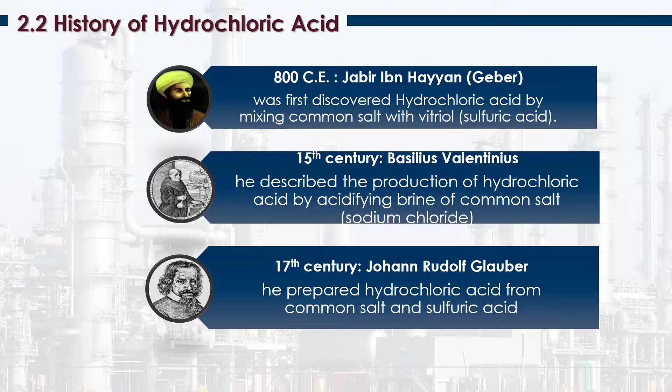In the 17th century, Johann Rudolf Glauber prepared hydrochloric acid from common salt and sulfuric acid. He was first to produce concentrated hydrochloric acid in 1625 by combining sulphuric acid and table salt. In the year 1772, Joseph Priestley of Leeds discovered hydrogen chloride, which he called marine acid air. This was made by heating copper with spirit of salt, but he eventually realized that the marine acid air was simply the fumes of the spirit of salt.

In the year 1818, Humphry Davy of Penzance proved that the chemical composition included hydrogen and chlorine. When Davy decomposed hydrochloric acid, then known as muriatic acid, he found that it consisted solely of hydrogen and chlorine.

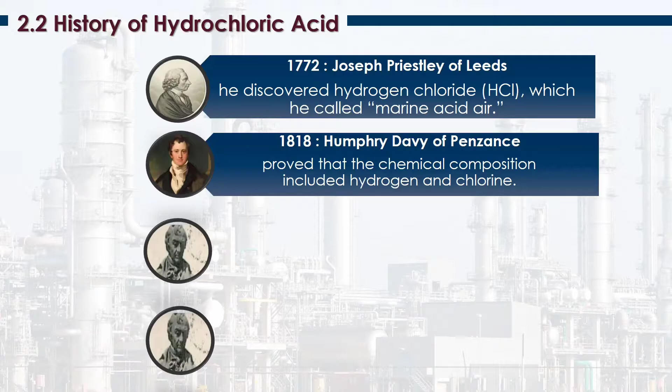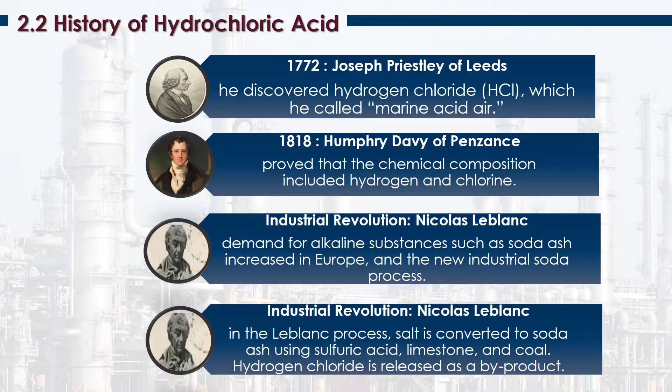During the Industrial Revolution, demand for alkaline substances such as soda ash increased in Europe, and Nicolas Leblanc developed the new industrial soda process for making soda ash, sodium carbonate, from common salt or sodium chloride. This process, which bears his name, became one of the most important industrial chemical processes of the 19th century. Moreover, in the Leblanc process, salt is converted to soda ash using sulphuric acid, limestone, and coal. Hydrogen chloride is released as a byproduct. And early in the 20th century, the Leblanc process was effectively replaced by the Solvay process without the hydrochloric acid byproduct.

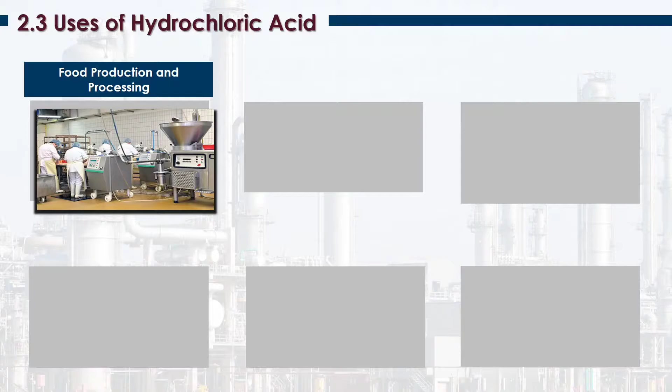Uses of hydrochloric acid for food production and processing. The food industry uses hydrochloric acid to process a variety of food products such as corn syrups used in soft drinks, cookies, crackers, ketchup, and cereals. Hydrochloric acid is also used as an acidifier in sauces, vegetable juices, and canned goods to help enhance flavor and reduce spoilage. For regeneration of ion exchangers, hydrochloric acid is more efficient than sulfuric acid to regenerate a strongly acidic cation exchanger.

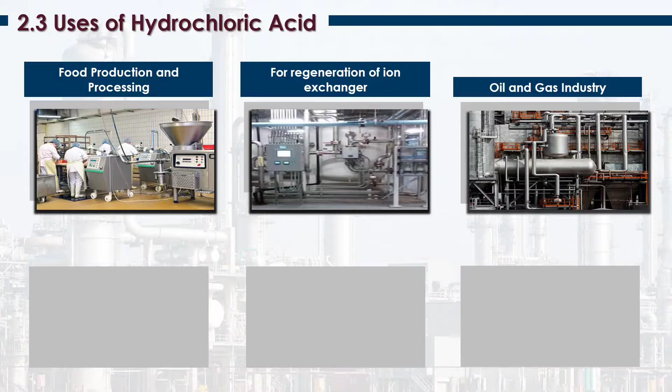For the oil and gas industry, hydrochloric acid is used in large quantities as a borehole drilling agent. This fracture stimulation fluid reduces the pH of drilling fluid systems and helps dissolve rock during drilling for the oil and gas industry. Also, hydrochloric acid is used in the activation of petroleum wells. For steel production, hydrochloric acid is a strong, corrosive acid that can be used industrially to process steel used in the building and construction industry.

For calcium chloride production, the process basically consists of limestone reaction with hydrochloric acid. It can also be produced as a byproduct from the Solvay process for soda ash. Calcium chloride solution can be produced by the neutralization of aqueous hydrochloric acid with calcium carbonate. For pH control, hydrochloric acid is supplied in liquid form of varying strengths. It is used for pH control when pool water is treated with sodium or calcium hypochlorite. Hydrochloric acid can be used to regulate the acidity of solutions.

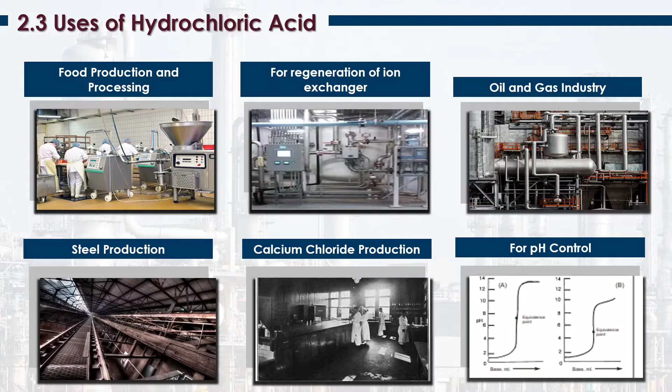Lastly, for leather processing. Hydrochloric acid is one of the substances used in the leather process. Hydrochloric acid was used to stop the development of bacteria and maintain the proper pH level of leather.

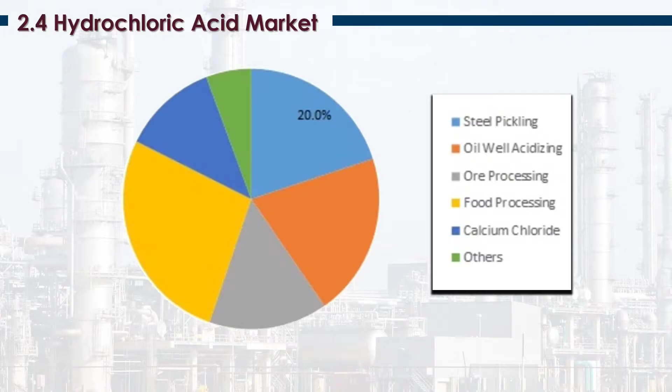Hydrochloric acid market. Most of the hydrochloric acid is produced from the chlorination of a wide variety of organic chemicals. It is an essential product of the chemical industry and used in many industrial processes such as oil well acidizing, food manufacturing, producing calcium chloride, ore processing and steel pickling.

As for regional analysis, first, Asia Pacific is estimated to have dominated the global hydrochloric acid market, with China, India, and ASEAN countries being the prominent markets in the region. The hydrochloric acid market in Asia Pacific is expected to be the fastest growing during the forecast period, owing to increasing manufacturing activities, growing population, and developing industries such as food, chemical, and textile in India and China.

Second, North America is expected to be the second largest market for hydrochloric acid. The North America market is expected to witness moderate growth during the forecast period. This growth can be attributed to increasing investment in hydraulic fracturing activities, growing construction industry, and increasing investment in the pharmaceuticals industry.

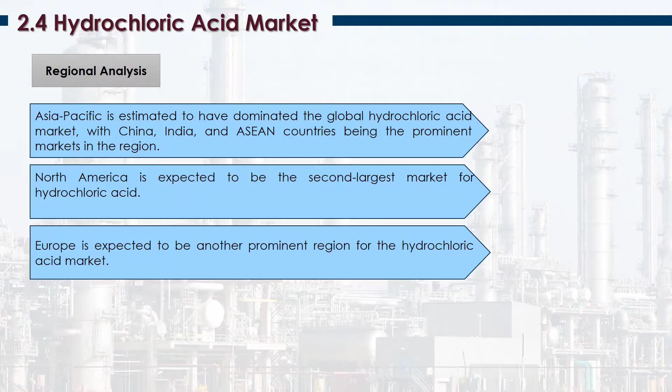Third, Europe is expected to be another prominent region for the hydrochloric acid market. The hydrochloric acid market in Europe is poised to witness steady growth backed by the growing chemical industry and increasing demand from the food and beverage industry. Germany, UK, Italy, and France are expected to be key markets for hydrochloric acid in Europe.

Fourth, the Middle East and Africa hydrochloric acid market is expected to witness moderate growth primarily owing to increasing investment in the oil and gas and steel industry in the region.

As for segmentation analysis, the global hydrochloric acid market has been segmented based on application, end-use industry, and region. Based on application, the global hydrochloric acid market has been categorized as steel pickling, oil well acidizing, ore processing, food processing, calcium chloride, and others.

By end-use industry, the global hydrochloric acid market has been divided into food and beverages, pharmaceuticals, textile, steel, oil and gas, chemical industry, and others. The global hydrochloric acid market by region has been segregated into North America, Latin America, Europe, Asia Pacific, and the Middle East and Africa.

Market overview of hydrochloric acid. The hydrochloric acid market was valued at around $950 million in 2020, and the market is projected to register a CAGR of over 5% during the forecast period. The COVID-19 pandemic had an adverse effect on the global economy, which includes disruption of the supply chain. Due to lockdown regulations and a deficient number of workers, the production in various chemical and other industries declined, and the supply of raw materials to the industries decreased.

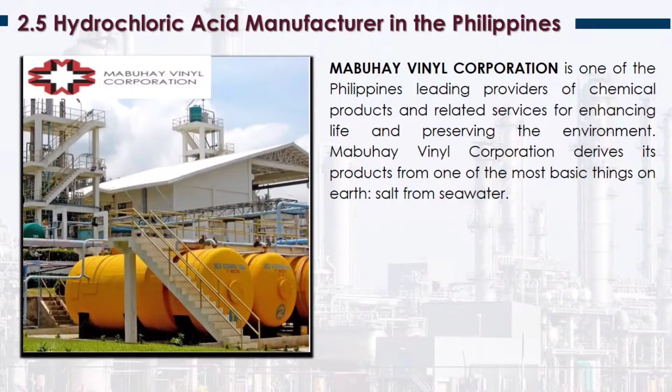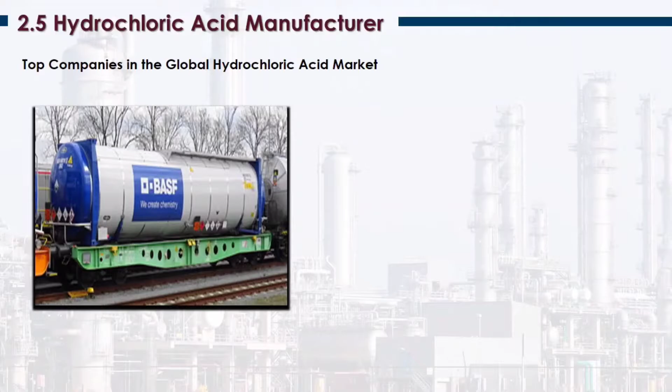So here are the top companies in the global hydrochloric acid market. Number 1, BASF. BASF was founded in the year 1865 and is currently headquartered in Germany. BASF is known to be the largest chemical producer in the world. The company's products and solutions primarily aim at conserving resources, ensuring good nutrition, and improving quality of life. Their product portfolio includes chemicals, plastics, performance chemicals, catalysts, coatings, crop technology, crude oil, and natural gas exploration and production.

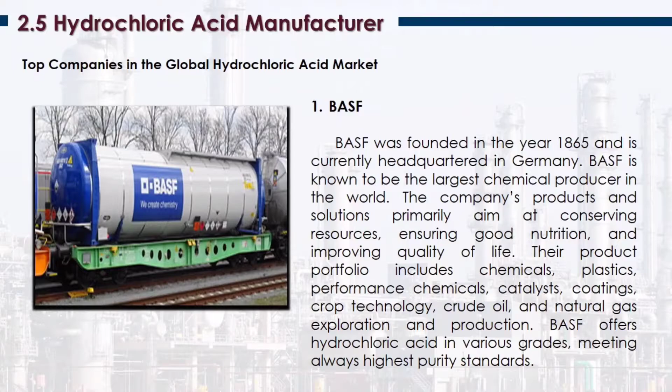BASF offers hydrochloric acid in various grades, always meeting the highest purity standards. The second one is Merck KGaA. Having a rich history of over 350 years, Merck KGaA is the world's oldest operating chemical and pharmaceutical company. Merck KGaA is a global company with approximately 53,000 employees spanning across 66 countries.

In the year 1967, the company initiated its involvement in liquid crystals, leading to its market-leading role today. Liquid crystals account for a major chunk of the company's profits at present. Currently, the company is the world leader in producing liquid crystals for flat TVs and monitors.

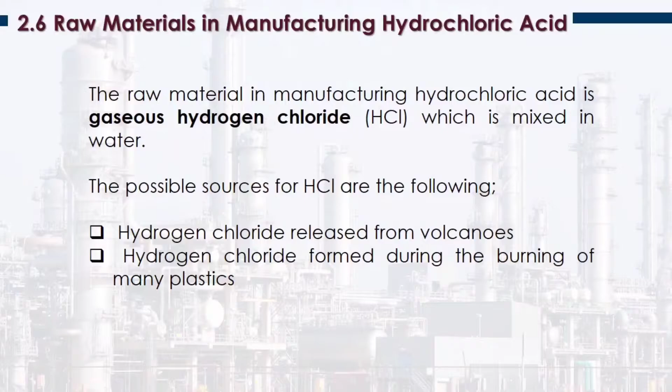So these are the raw materials in manufacturing hydrochloric acid. The raw material in manufacturing hydrochloric acid is gaseous hydrogen chloride, which is mixed in water. And the possible sources for this hydrochloric acid are the following. First, the hydrogen chloride released from volcanoes, and second, the hydrogen chloride formed during the burning of many plastics.

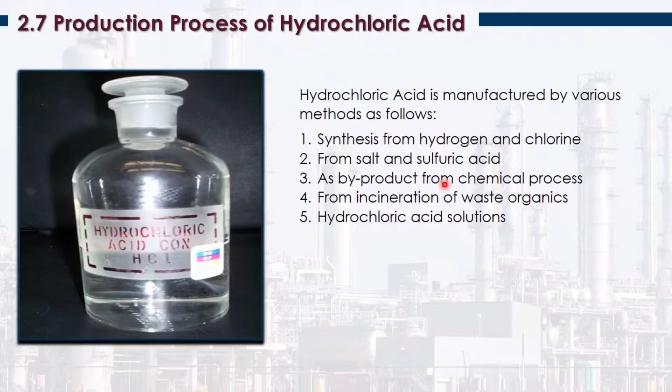Production process of hydrochloric acid. Hydrochloric acid is manufactured by various methods as follows. First, we have synthesis from hydrogen and chlorine. Second, from salt and sulfuric acid. Third, as byproduct from chemical process. Fourth, from incineration of waste organics. And the last one is hydrochloric acid solutions. From these methods, we will only be focusing on the first two methods: the synthesis from hydrogen and chlorine and from salt and sulfuric acid.

So the first step in manufacturing hydrochloric acid is by synthesis from hydrogen and chlorine. There is large demand in the market for water white acid. Such acid is obtained by the synthetic method, and most of the plants are based on this process. The raw materials are the following. For the basis of 1,000 kg of hydrochloric acid with a 98% yield, we have hydrogen 28.21 kilograms, and for chlorine

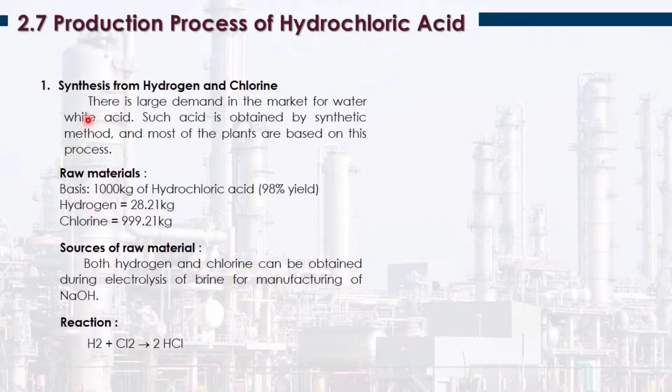999.21 kilograms. For the sources of raw material, both hydrogen and chlorine can be obtained during electrolysis of brine for manufacturing NaOH or sodium hydroxide. The reaction is 1 mole of hydrogen reacts with 1 mole of chlorine to yield 2 hydrogen chloride: H2 + Cl2 → 2HCl. Okay.

So here is the simple process flow diagram in manufacturing hydrochloric acid from synthesis of hydrogen and chlorine combustion. As you can observe in this diagram, the hydrogen is burning in the presence of chlorine gas here in the combustion chamber. As the combustion of hydrogen takes place with the presence of this chlorine gas, there will be hydrochloric acid vapors produced.

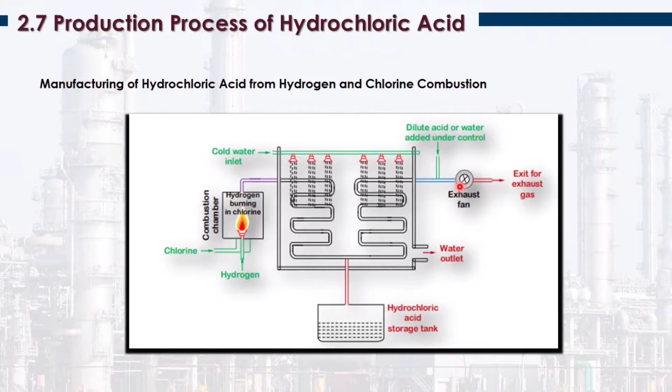And then the exhaust gas which is free from these hydrochloric vapors is released through the exhaust fan. So the gas that was not dissolved here with the hydrochloric vapors will be released through the use of this exhaust fan.

So the second method in manufacturing hydrochloric acid is the salt sulfuric acid process. In this method, the reaction between sodium chloride, NaCl, and sulfuric acid occurs in two endothermic stages. The raw materials for 1,000 kilograms of hydrochloric acid: sodium chloride will be 3,206 kilograms and sulfuric acid 2,688 kilograms.

Sources of raw materials: sodium chloride can be obtained from seawater, salt lakes, and subsoil water, and sulfuric acid can be obtained by contact process. The reactions are the following. Sodium chloride is reacted with H2SO4, sulfuric acid, to yield sodium bisulfate and hydrochloric acid. Second, NaCl is reacted with sodium bisulfate to produce sodium sulfate and hydrochloric acid.

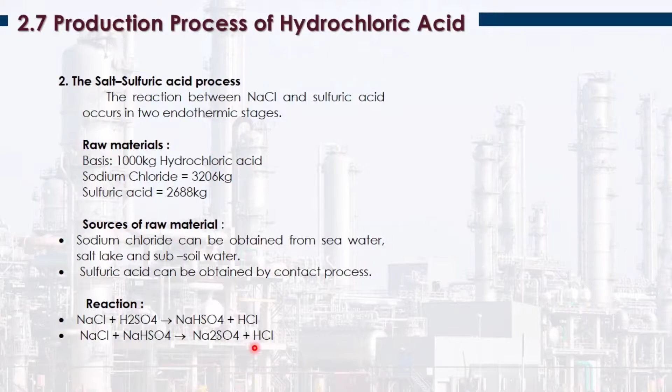Okay, so this diagram is the manufacturing of hydrochloric acid from salt and sulfuric acid. In the first step, their process of obtaining hydrochloric acid is different; here they used salt and sulfuric acid. As you can see in the diagram, our feeds are the salt, or sodium chloride, and the sulfuric acid, which are introduced to the reactor.

The reactor in this case is nothing but the furnace operated on fuel. In this reactor, the byproduct, sodium sulfate, is removed from the bottom of the furnace. And the product mixture containing hydrochloric acid vapors is passed to the cooler. So there is remaining hydrochloric acid vapor here, which passes through to the cooler.

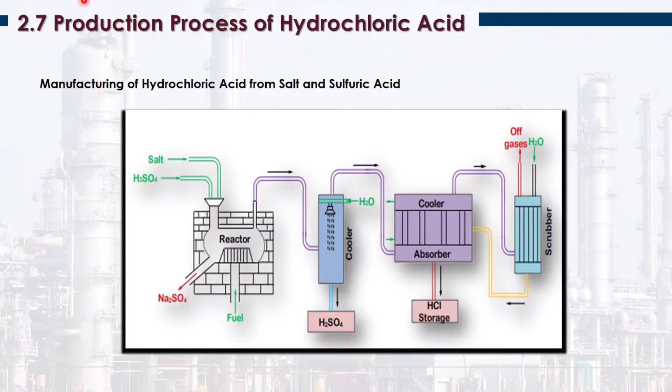The third method in producing hydrochloric acid is as byproduct from chemical processes. Over 90% of the hydrogen chloride is produced as a byproduct from various chemical processes. The crude HCl or the hydrochloric acid generated in these processes is generally contaminated with impurities such as unreacted chlorine, organics, chlorinated organics, and entrained catalyst particles. A wide variety of techniques are employed to treat these HCl streams to obtain either anhydrous HCl or hydrochloric acid.

Some of the processes in which HCl is produced as byproduct are the manufacture of chlorofluorohydrocarbons, manufacture of aliphatic and aromatic hydrocarbons, production of high surface area silica, and the manufacture of phosphoric acid and esters of phosphoric acid. So here, most of hydrochloric acid is produced from chlorination of organic chemicals with much smaller amounts derived from the other processes. So in this process, we also consider the chlorination of organic chemicals.

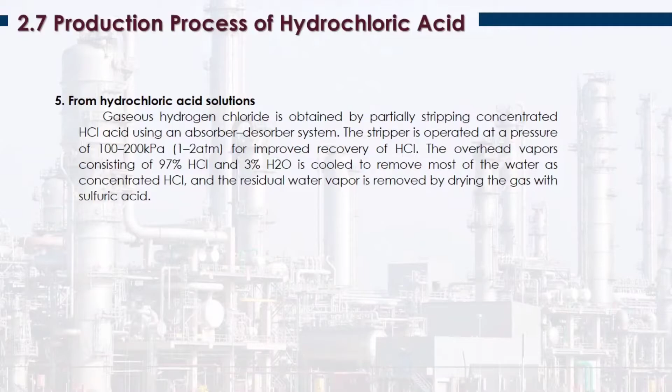So, the last method is from hydrochloric acid solutions. Gaseous hydrogen chloride is obtained by partially stripping concentrated HCl acid using an absorber-desorber system. The stripper is operated at a pressure of 100 to 200 kPa or 1 to 2 atm for improved recovery of HCl. The overhead vapors consisting of 97% HCl and 3% water are cooled to remove most of the water as concentrated HCl, and the residual water vapor is removed by drying the gas with sulfuric acid.

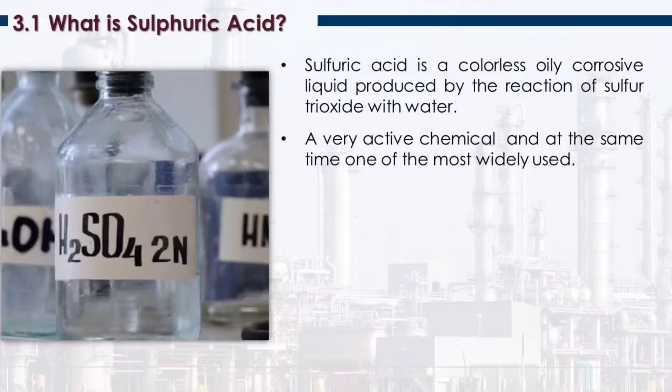Actually, it is known as the king of chemicals, and this is because of its direct and indirect applications in the manufacture of many chemicals. It is used in the preparation of hydrochloric acid, nitric acid, dyes, drugs, and many more. It also enters into many industries and is employed in the manufacture of fertilizers, leather and tinplate, in the refining of petroleum, and in dyeing of fabrics.

It is a dibasic acid with a molecular formula written as H2SO4. So sulfuric acid is a dibasic acid because it ionizes in aqueous solution to produce 2 hydrogen ions per molecule of the acid, or in other words, it contains 2 replaceable hydrogen ions per molecule of the acid. Its available forms include dilute sulfuric acid and concentrated sulfuric acid. Sulfuric acid is generally always found in concentrated form. It is available at concentrations as high as 98%. The dilute sulfuric acid is that in which the concentration of the water mixed in the acid is higher than that of the concentration of the acid itself.

So other names of sulfuric acid include king of compounds or king of chemicals, as mentioned a while ago, oil of vitriol, dipping acid, battery acid, electrolyte acid, Mattling acid, and dihydrogen sulfate.

Next, the properties of sulfuric acid. So again, it is a colorless, oily liquid with a density of 1.8 grams per cubic centimeter. So it has a high viscosity when it is not dissolved in water. Its density is almost twice the density of water because water has a density of about 1 gram per cubic centimeter. Hence, it is quite a dense liquid.

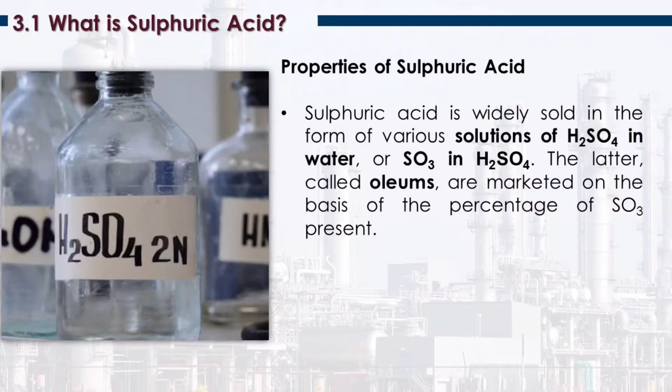So let me discuss more about its reaction with water. So what does sulfuric acid do with water? Concentrated sulfuric acid has a very strong affinity for water. The affinity of sulfuric acid for water is sufficiently strong that it will take hydrogen and oxygen atoms out of other compounds. It can also absorb water even from gases like the air, for instance, and even from hydrated

salts. So when some salts have water ingrained in their structure, sulfuric acid can actually remove that water, and this is because it is strongly attracted to it. So this makes it a very good drying agent, but take note that it is very dangerous.

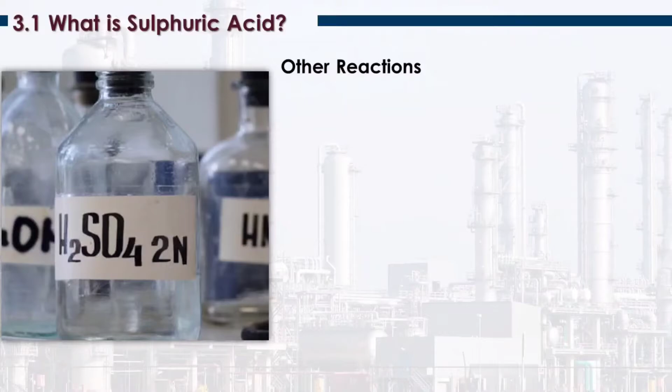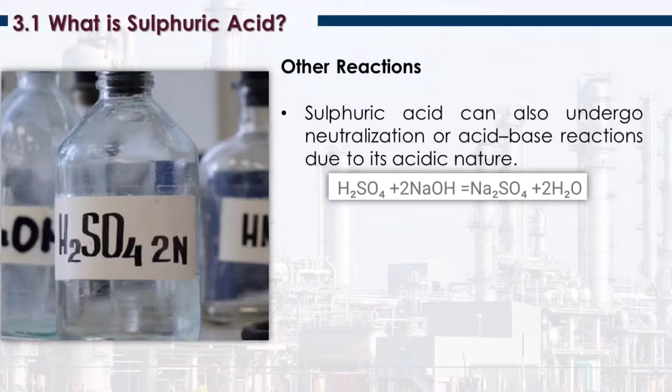Next, other reactions of sulfuric acid. Sulfuric acid can also undergo neutralization or acid-base reactions due to its acidic nature. So for example, this reaction between sulfuric acid and sodium hydroxide. This reaction is an acid-base neutralization reaction between a strong acid and a strong base, and their products will be salt and water.

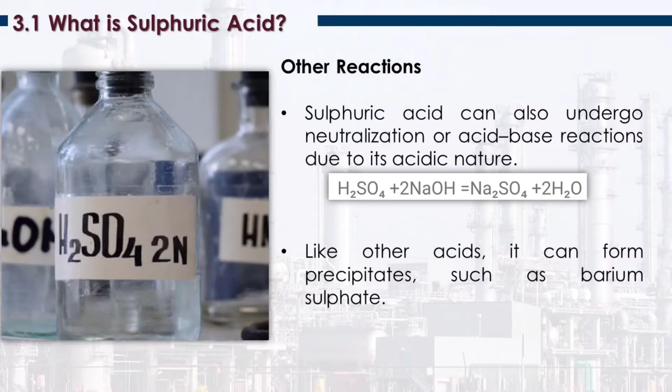So like other acids, it can form precipitates such as barium sulfate. If you mix it with barium, you can form barium sulfate. So let's proceed to the history of sulfuric acid. The origin of the first sulfuric acid is actually unknown, but there is evidence that it was known prior to the 10th century. It is mentioned from a source that the discovery of sulfuric acid is credited to the 9th century physician and alchemist Ibn Zakariya al-Razi, who obtained the substance by dry distillation of vitriol and alcohol.

And in the 15th century in Germany, a Benedictine priest and secret alchemist known as Basilius Valentinus was among the first recorded manufacturers of sulfuric acid. It is assumed that he most likely produced the acid by burning naturally occurring sulfur with potassium nitrate, also called saltpeter. Valentinus' methods carried on long after he died into the 18th century.

Although the method had been gradually improved upon, the acid was now formed by the combustion of sulfur in bell-shaped earthen containers, where the sulfur dioxide formed by the reaction was absorbed by water that was also added during the reaction. Later on in the century, the earthenware vessels were replaced with glass jars. A major improvement made on the reaction was the use of catalysts to speed up the reaction. Sometime in the 1600s, alchemists found that saltpeter, an ingredient in gunpowder, increased the rate of this reaction.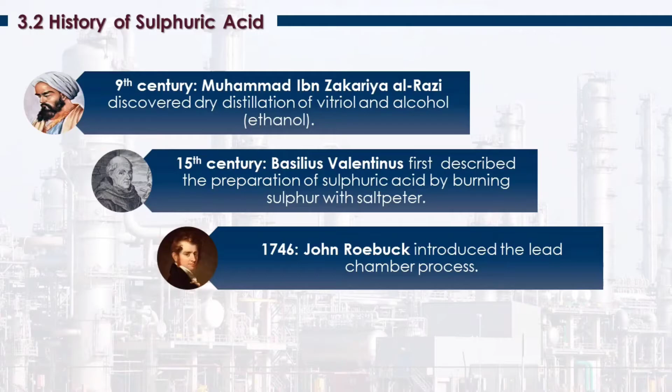So finally, in 1831, a British vinegar merchant named Peregrine Phillips developed the contact process. Phillips' process eventually replaced the lead chamber process and allowed for an increase in the amount of sulfuric acid produced. However, sulfuric acid was not in very high demand at the time of the conception of the contact process, and therefore its usage for large-scale industrial purposes did not begin until much later, when the acid became a staple constituent in the manufacture of synthetic dyes.

So next is in the explosives production. Sulfuric acid is one of the components required for the preparation of explosives. TATP, or triacetone triperoxide, is an explosive which is prepared by taking hydrogen peroxide, acetone, and sulfuric acid as the basic raw materials.

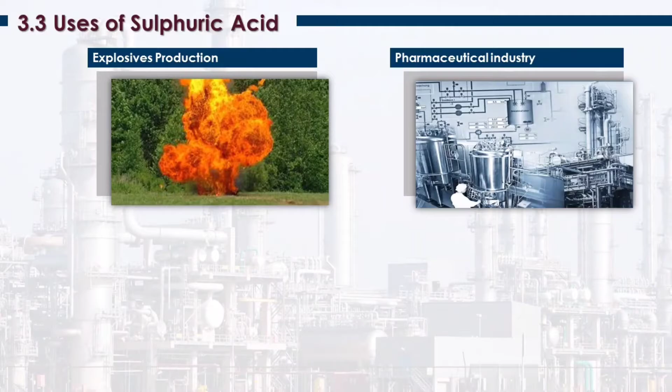So next is in pharmaceutical industry. Sulfuric acid finds a wide range of applications in the pharmaceutical industry. It is used as a solvent for the chemical synthesis of a variety of chemical substances, including active pharmaceutical ingredients. One of the types of pharmaceutical ingredients manufactured by using sulfuric acid are the alkylating agents, which are commonly used in the chemotherapy.

Next is in the manufacture of lead acid type batteries. Sulfuric acid also finds an application in electrochemical reaction where it serves as an electrolyte. It is particularly used in the electrodes which make up the lead acid battery cells, which are quite commonly used in the automobile industry.

Next, in the manufacture of paints and pigments. Sulfuric acid is used to prepare many dyes and pigments in coloring industry. One of the famous coloring agents used industrially is the titanium dioxide, which is prepared as a result of treatment of titanium iron oxide mineral ore, also commonly known as ilmenite, with concentrated sulfuric acid and titanium oxygen sulfate.

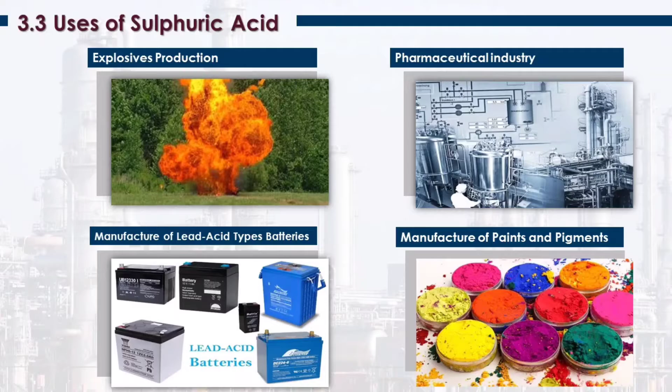It is also used in the manufacture of rayon. Rayon is a regenerated cellulose fiber that is made from natural sources of cellulose such as wood and related agricultural products. To carry out the manufacturing, the raw cellulose fibers obtained are dissolved in an aqueous solution which contains ions of tetraamine copper. The resulting solution is then injected into concentrated sulfuric acid, leading to the formation of fibrous rayon.

Next is in the manufacture of synthetic detergents. Sulfuric acid is used in the production of synthetic detergents such as LABSA or linear alkyl benzene sulfonic acid. This is also used in the preparation of acid slurry or dodecyl benzene sulfonic acid by sulfonation of benzene. This acid slurry produced is further used for the manufacture of various detergents and soap.

It is also used as oxidizing and dehydrating agent. Sulfuric acid is a good oxidizing agent and is used in many chemical reactions for the oxidation of a variety of substances. Apart from being an oxidizing agent, it is also widely used as dehydrating agent for the dehydration of various sugars to form a solid black film of carbon as residue.

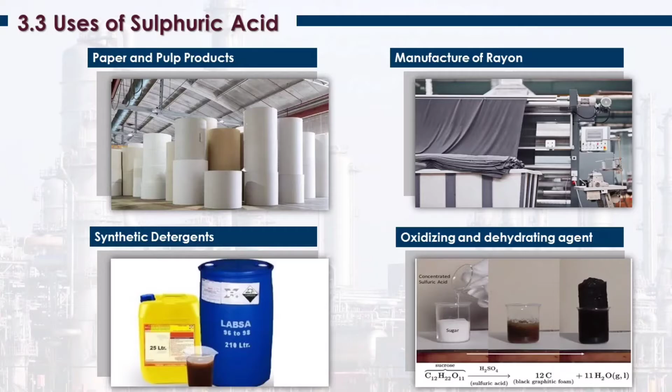In the agricultural industry, sulfuric acid is used in the harvesting of potatoes. A solution of sulfuric acid is sprayed on the potato fields before harvesting them to make the green tops of the potato plant dehydrated and then they eventually dry out. It makes it easy for the farmers to separate them before they could send the crop into the harvesting machine.

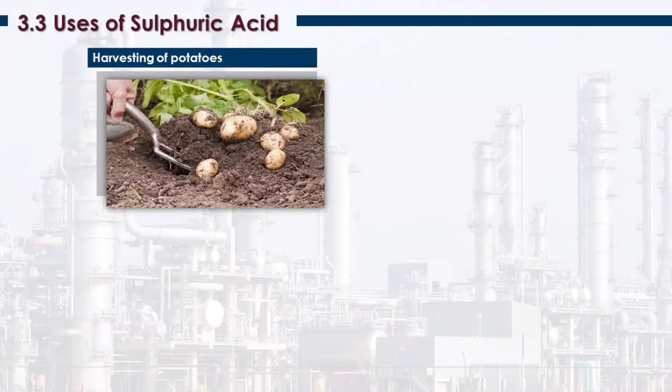Next, sulfuric acid also acts as a catalyst in many reactions carried out industrially. Some of the common examples of its use as catalyst includes its inclusion in the reaction involving the production of caprolactam from cyclohexanone oxime. This caprolactam is further used for the production of nylon in the textile industry.

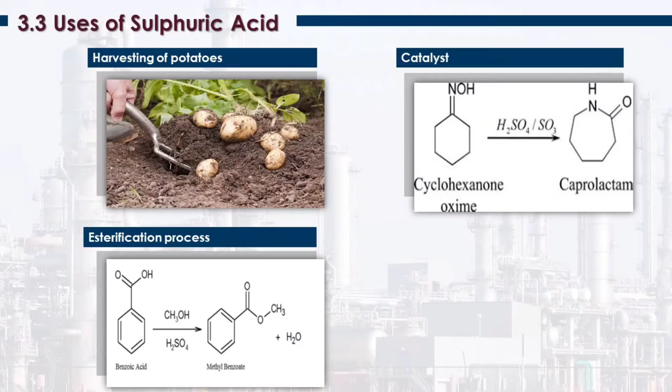So it is also used in esterification process. Sulfuric acid is the medium in which esterification reactions take place. In chemistry, esterification reactions are used to produce a new class of organic compounds named esters as a result of the chemical reaction between an organic acid and alcohol. The reaction is catalyzed in an acidic medium provided by sulfuric acid.

And lastly, in household cleaning, sulfuric acid has been conventionally used for the cleaning of toilet seats and other dirty washroom areas like drains.

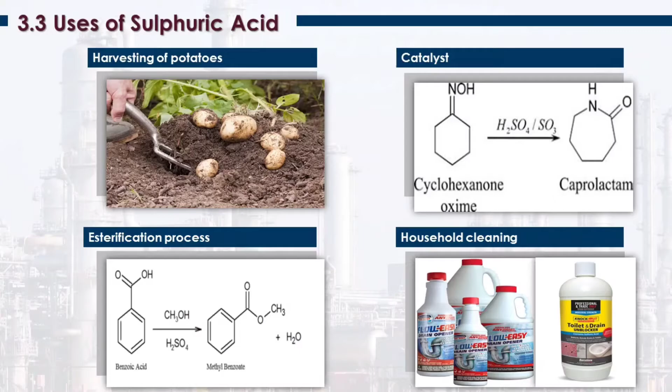So let's proceed to sulfuric acid market. Market overview. So the market for sulfuric acid is expected to grow at CAGR of over 3% globally during the forecast period. CAGR means compound annual growth rate. So the major factors driving the market studied are the increasing application in fertilizers manufacturing and growing demand from chemical and pharmaceutical industries. This is according to Mordor Intelligence from the report of sulfuric acid growth trends and forecast 2021 to 2026.

Also, the global sulfuric acid market is fragmented with players accounting for a marginal share of the market. Few companies include KMG Chemicals, INEOS Sulfur Chemicals, PhosAgro Group of Companies, Aurubis AG, and Nouryon. So the sulfuric acid market is segmented by raw material, end user industry, and geography. So let's start by raw material.

Elemental sulfur raw material segment grabbed significant market share in 2016 and is projected to progress at the fastest rate over the forecast period. The raw material causes less pollution in comparison to pyrite ore or base metal smelters and is available in abundance in the industry. In order to restrict or curb environmental pollution, a large number of companies have adopted stringent measures to treat the emitted sulfur gas before releasing it into the atmosphere.

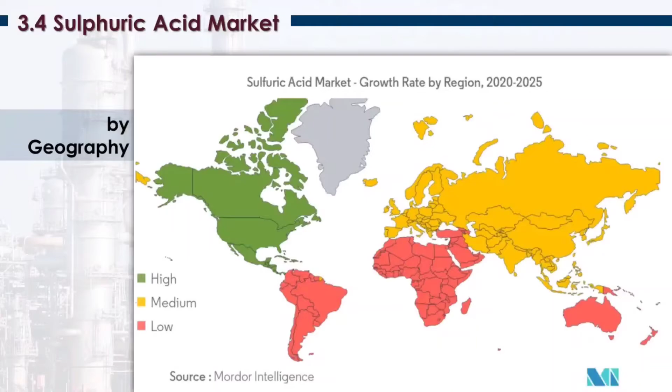Manufacturer of sulfuric acid in the Philippines. The top manufacturer of sulfuric acid in the Philippines is the CMC or the Chemphil Manufacturing Corporation, which is 100% owned by LMG Chemicals Corporation. The plant is located at Kalawaan, Pasig, and the main products are sulfuric acid, oleum, and sulfur flakes. CMC provides a clear solution to the critical problem of the local oil refineries, which is the recycling of molten sulfur.

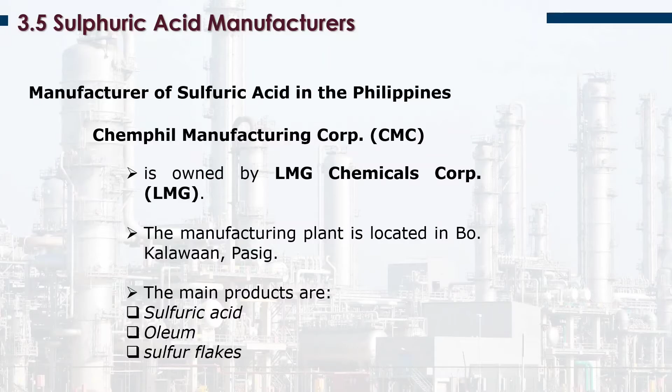So let's take a look at the manufacturers of sulfuric acid globally. The first company is the Mosaic Company, which is located in the United States. Mosaic is the world's leading producer and marketer of concentrated phosphate and potash, both of which are used in the manufacturing of fertilizer. Mosaic's facility in Uncle Sam, Louisiana is one of its principal phosphate production facilities and produces phosphoric acid, sulfuric acid, and silicon tetrafluoride.

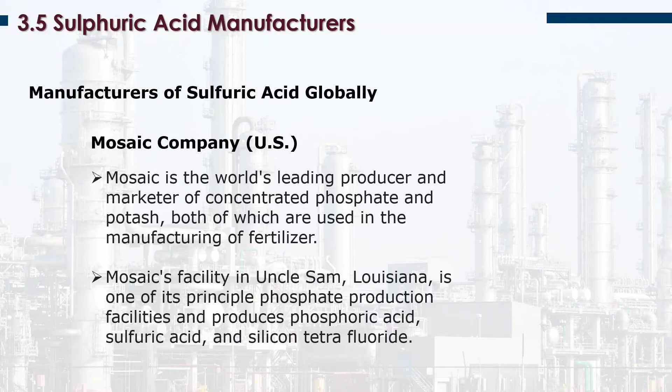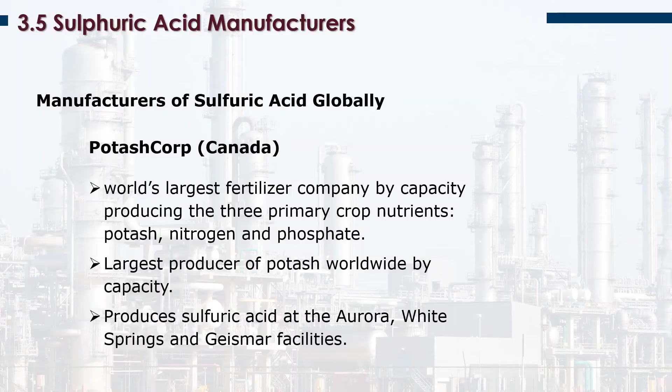So the next manufacturer is the Potash Corporation, which is located in Canada. From the company name itself, we can conclude that the main product is potash. Potash Corporation is the world's largest fertilizer company by capacity, producing the three primary crop nutrients, which are potash, nitrogen, and phosphate. Potash Corporation is also the largest producer of potash worldwide by capacity. Potash Corporation produces sulfuric acid at the Aurora, White Springs and Geismar facility.

The next one is the Ma'aden Saudi Arabian Mining Company, which is of course located in Saudi Arabia. Dated back in June 2011, Ma'aden Phosphate Company or MPC includes a phosphate mine and beneficiation plant at Al Jalamid in the north of Saudi Arabia and a processing complex at Ras Az-Zor on the kingdom's east coast, consisting of 4 plants producing sulfuric acid, ammonia, phosphoric acid, and DAP respectively. This company is also one of the top manufacturers of sulfuric acid globally.

So the last group is the Office Chérifien des Phosphates Group or the OCP Group, which is located in Morocco. Dated back in March 7, 2019, Morocco's OCP Group and Spain's ACS Group signed 2 contracts to build 2 factories in Jorf Lasfar, which is 120 kilometers south of Casablanca. The project will be 2 of the largest sulfuric acid plants in the world. The sulfuric acid will be mainly used in the manufacture of granulated phosphate fertilizers.

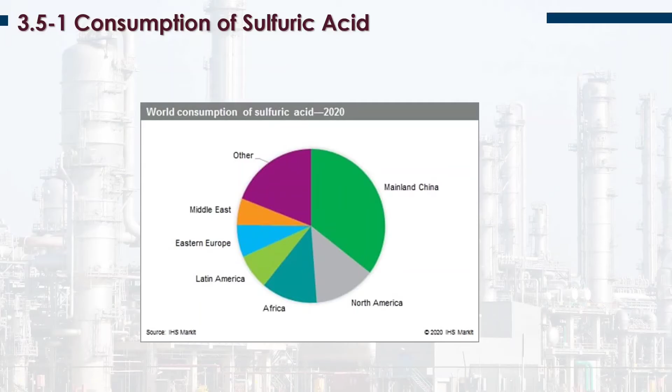The following are the raw materials for the contact process: first is sulfur, followed by air and then water. The sources of sulfur and sulfur dioxide are as follows. Sulfur can be gathered from mines, and it can also be recovered from petroleum desulfurization along with hydrogen sulfide. Sulfur dioxide can be recovered from coal or oil-burning public utility stack gases, and it can also be recovered from smelting of metal sulfide ores and isolation of sulfur dioxide from pyrite.

The industrial manufacture of sulfuric acid is done mainly by 2 processes: the lead chamber process and the contact process. For this report, we will focus on the contact process since it is the latest and the most used in industry.

The first one that we will discuss is the lead chamber process. The lead chamber process is the oldest process for manufacturing sulfuric acid, dating back 200 years. It was first developed by John Roebuck in 1746. The lead chamber process remained a standard method of production for sulfuric acid for almost 2 centuries. It was so robust that even as late as 1946, the chamber process still accounted for 25% of sulfuric acid manufactured.

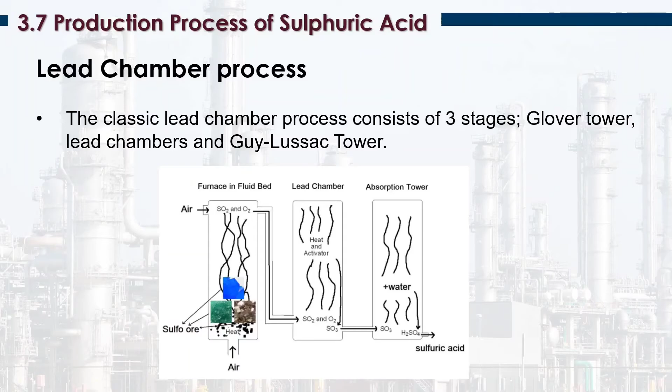The classic lead chamber process consists of 3 stages: the Glover Tower, lead chambers, and Gay-Lussac towers. These stages are discussed one by one in the next slides. Let's start with the first stage, which happens in the Glover Tower. The process starts with hot sulfur dioxide gas entering at the bottom of a reactor called the Glover Tower, where it is washed with nitrous vitriol and mixed with nitric oxide and nitrogen dioxide gases. The Glover Tower has 2 functions: the concentration of the chamber acid and the stripping of nitrogen oxide from the liquid to the gas, or denitration.

Concentration of chamber acid, which is usually around 62% to 68% sulfuric acid, is achieved by the hot gases entering the tower, which evaporate water from the acid. Some of the sulfur dioxide is oxidized to sulfur trioxide and dissolved in the acid wash to form tower acid or Glover acid at about 78% sulfuric acid. The dissolved nitrogen oxides are stripped from the acid and carried with the gas out of the Glover Tower into the lead chamber, which is the second stage.

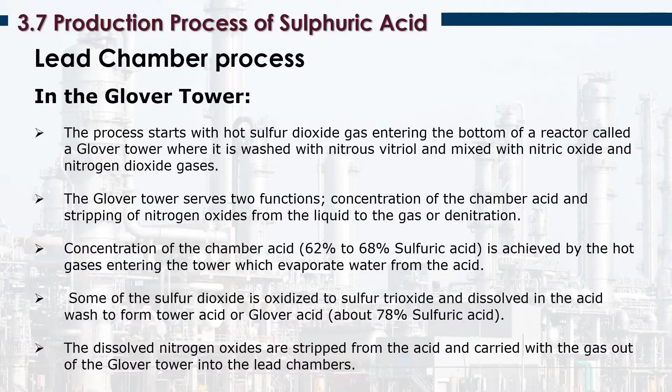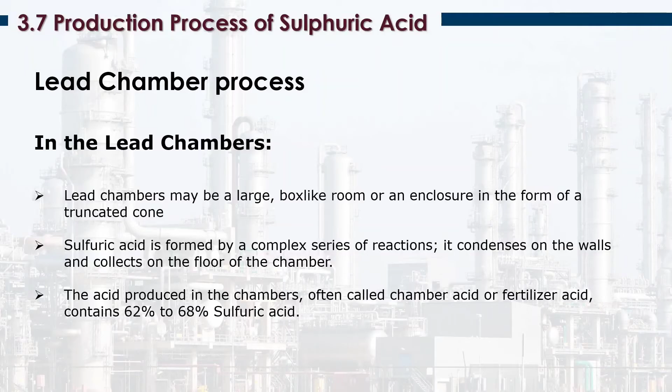Let's proceed to the second stage of the lead chamber process, which happens in the lead chamber. From the Glover Tower, a mixture of gases is transferred to a lead-lined chamber where it is reacted with more water. Those chambers are the lead chambers. Lead chambers may be a large box-like room or an enclosure in the form of a truncated cone. Sulfuric acid is formed by a complex series of reactions, and it condenses on the walls and collects on the floors of the chamber. There can be 3 to 12 chambers, with the gases passing through each chamber in succession. The acid produced in the chambers, often called chamber acid or fertilizer acid, contains 62% to 68% sulfuric acid.

The last stage of the lead chamber process happens in the Gay-Lussac tower. The gases from the previous chambers are passed into a reactor, the Gay-Lussac tower, where they are washed with cold concentrated acid. The nitrogen oxides and unreacted sulfur dioxide dissolve in the acid to form nitrous vitriol used in the Glover Tower. The waste coming from the Gay-Lussac Tower is just discharged to the atmosphere since it is not toxic or hazardous. Product acid at a concentration of 78% sulfuric acid is drawn from the cold acid stream that is circulated from the Glover Tower to the Gay-Lussac Tower. Also, nitrogen losses are made up with nitric acid, which is added to the Glover Tower.

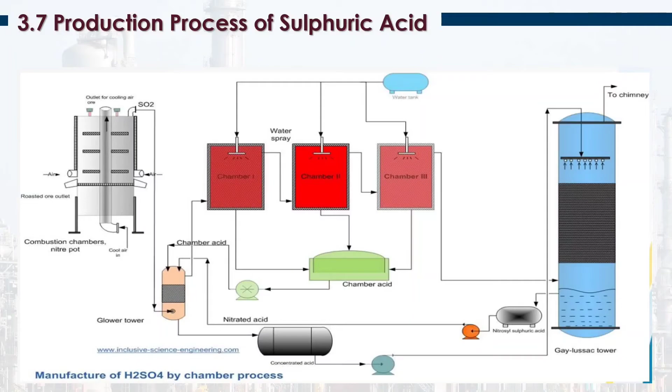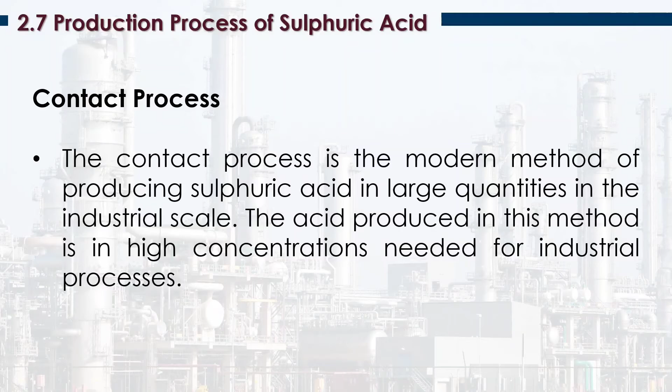So, ito po yung diagram ng lead chamber process natin. So, let's proceed with the contact process. So, yung contact process po is actually the latest and the most widely used process in producing sulfuric acid po. The reason for this is because the acid produced in this method is in high concentrations needed for industrial processes.

So the following are the equipments used in producing sulfuric acid by contact process. The equipments are sulfur burner, centrifugal pumps, blowers, drying towers, waste heat boilers, electrostatic dust precipitator, heat exchanger, four-pass converter, economizer, and absorbing tower. So, i-discuss po natin to isa-isa in the next slides.

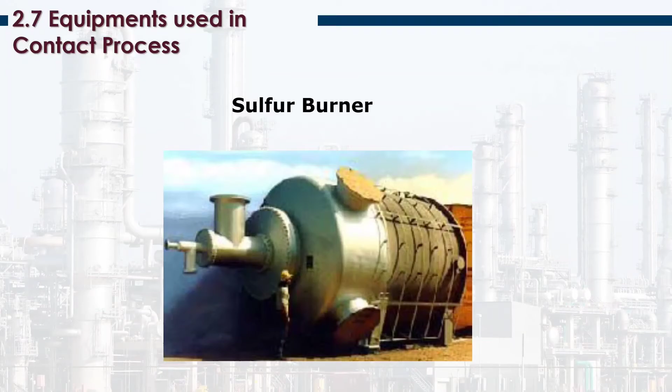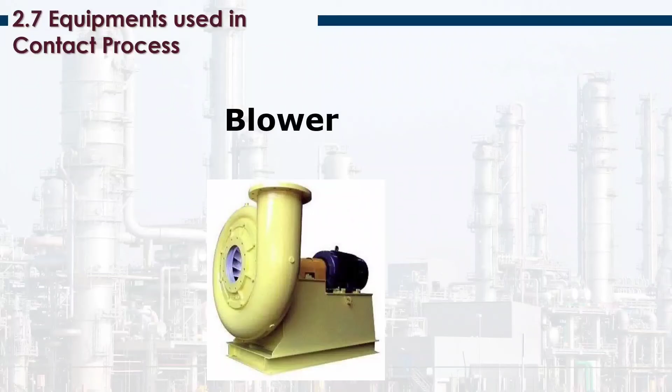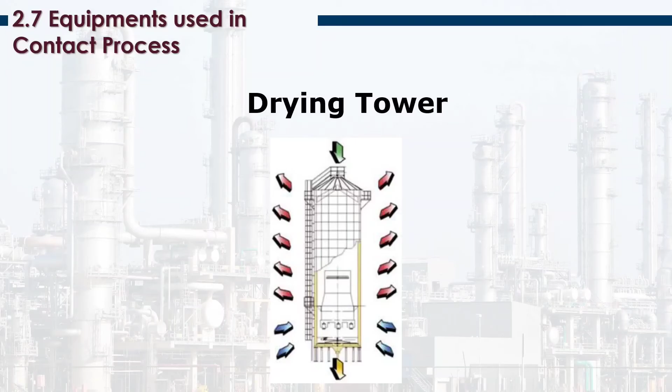Next is the blower. The blower is used to propel the air at high pressure, which will react with sulfur in a burner. So blower is actually the major energy consumer. Next is drying tower. From the name itself, drying tower is used to remove moisture from air by sulfuric acid, which is about 93 to 98%.

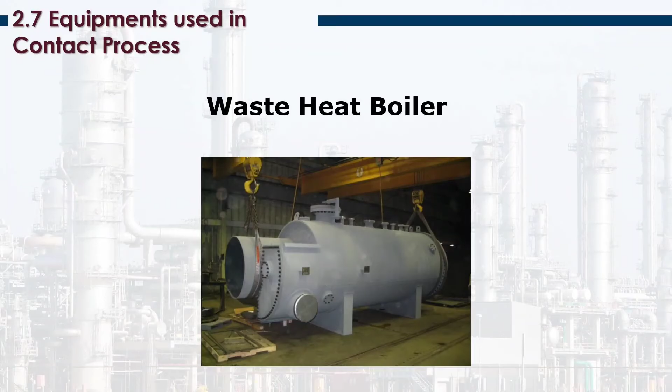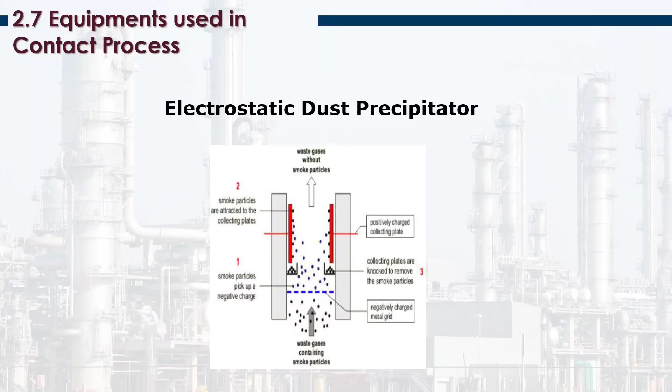Next one is the electrostatic dust precipitator. So, ang main role po nito is to separate the unwanted particles by electrostatic attraction po. Ang ginagawa niya is, sineseparate niya yung dust and smoke particles from sulfur dioxide and pinupush niya into the scrubbers. So, the next one is the heat exchanger.

The role of a heat exchanger is to provide for hot or cold split flow gas streams through exchanger shells with either mixing or splitting into two or more streams to provide for reduced condensable materials for condensation, corrosion, metal thermal differential stress, and capital equipment cost. Ang nangyayari din dito sa heat exchanger is nag-e-exchange yung heat of sulfur trioxide by air to maintain the temperature of a four-pass converter from 600 to 450 degrees Celsius.

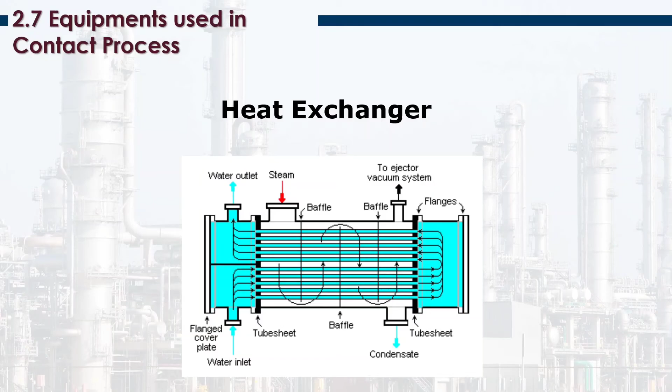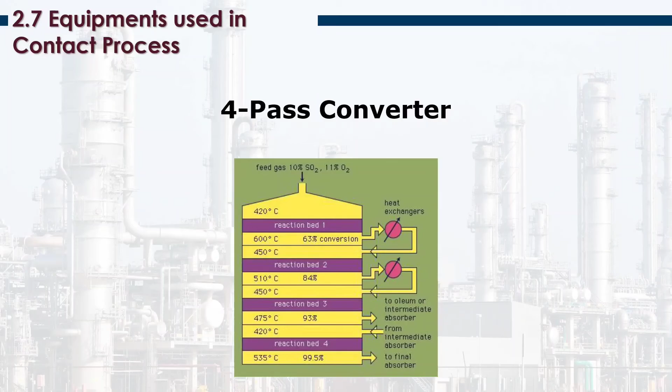Next is the economizer. Yung sulfur trioxide kasi na galing sa four-pass converter, ang temperature niya is usually 535 degrees Celsius. So, ang role ng economizer ngayon is to control the heat of sulfur trioxide and also to produce steam.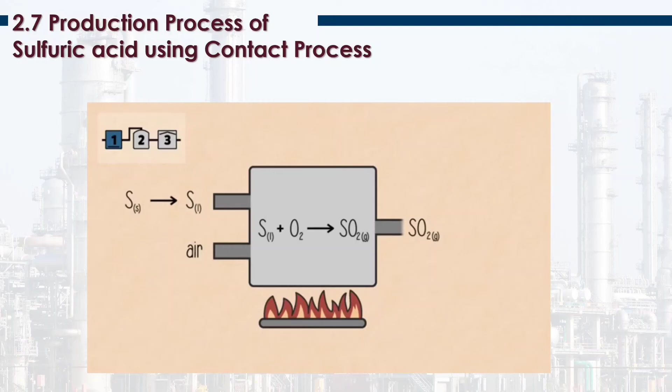Sulphuric acid is a very valuable chemical. It is used in the manufacture of detergents, dyes, fabrics, fertilizers, paints and plastics, and in many other products. But how is sulphuric acid made? Sulphuric acid is made in a three-stage process called the contact process. In stage 1, sulphur is obtained in its elemental form, a solid, it is melted and is then combusted in oxygen. What do you think is formed at this stage? Could you write a chemical equation for this? Pause, think, and continue when you're ready. The product formed at this stage is sulfur dioxide, and the chemical equation for this is shown.

Did you get it right? In stage 2, the sulfur dioxide is converted into sulfur trioxide. The reaction is in equilibrium, which means that as the product is formed, the reverse reaction can also occur and it can break down into its reactants. What can be done to this process to speed it up and to force the equilibrium into forming more sulfur trioxide? Pause the video and continue when ready.

This reaction can be sped up to form sulfur trioxide by adding a catalyst, vanadium oxide. This is an exothermic reaction, which means it gives out heat. Usually, this means that the formation of sulfur dioxide, the backward reaction, would be favoured at higher temperatures. However, the catalyst needs a temperature over 400 degrees centigrade for it to work, so the idea is a trade-off.

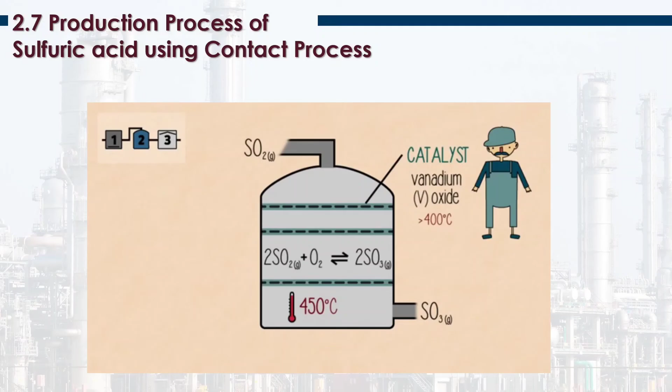The reaction actually takes place at 450 degrees centigrade. You need the gases to reach equilibrium within the very short time that they are in contact with the catalyst in the reactor. So having an increased temperature ensures a high rate of reaction, meaning you establish the forward reaction quickly.

Finally, in stage 3, sulfur trioxide is converted into a very concentrated sulfuric acid, and the equation is shown now. This liquid is also known as oleum. It is very viscous and releases acidic fumes. It is very important at this stage to add water carefully, usually as a mist to sulfur trioxide. This is because the reaction is very exothermic, so mixing it with pure water would release a mist of sulfuric acid that would escape into the air.

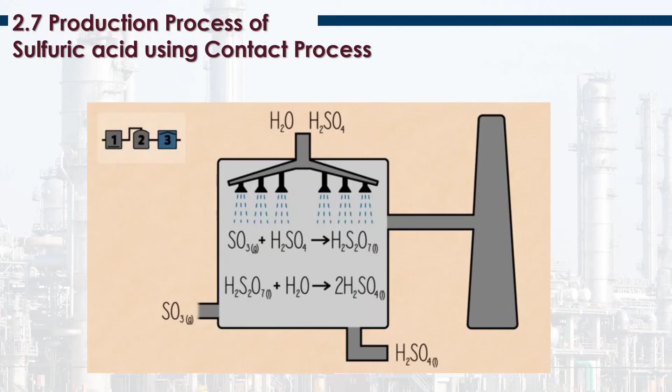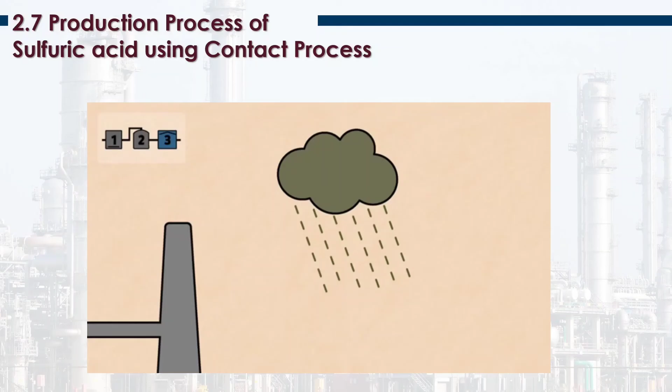99.5% pure sulfuric acid is then collected and is shipped off to where it is needed next. There are some acidic waste gases from stage 3 which can escape and cause local acid rain. Here's a challenge for you. What can you fit the chimney with to stop these gases from being released into the atmosphere?

The correct answer is that the chimney is usually fitted with alkaline scrubbers. These are bases like sodium carbonate. On contact, they neutralise the fumes, forming salt and water. Other ways to minimise the release of any sulfur oxides is by recycling gases between stages 2 and 3.

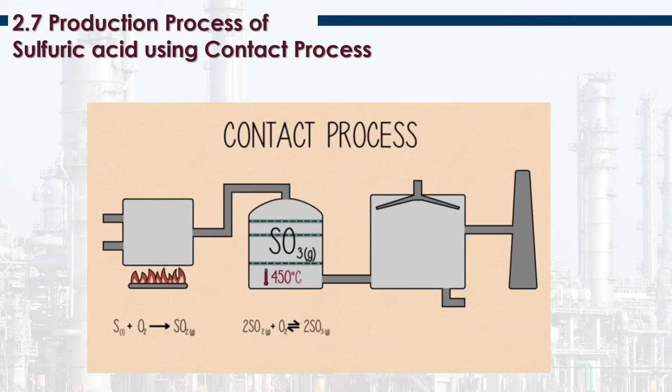In summary, the contact process converts sulfur to sulfur dioxide by combusting sulfur in air. The sulfur dioxide produced is heated to 450 degrees centigrade over a vanadium oxide catalyst. This produces sulfur trioxide. The sulfur trioxide is treated with a fine mist of water and 99.5% sulfuric acid is collected. The acidic fumes produced are treated with alkaline scrubbers to prevent local acid rain.